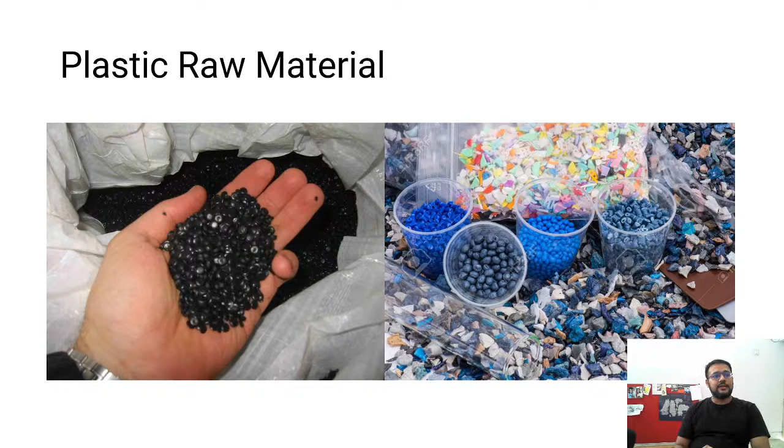There are of course many other ways, like for example, the base material could be lactic acid, which is typically extracted from cornstarch and some natural materials, even from plants. I don't know of any examples of plastics being extracted from animal items, but let's say plants. Polylactic acid is something very common to most people, where the plastic is extracted from plant byproducts.

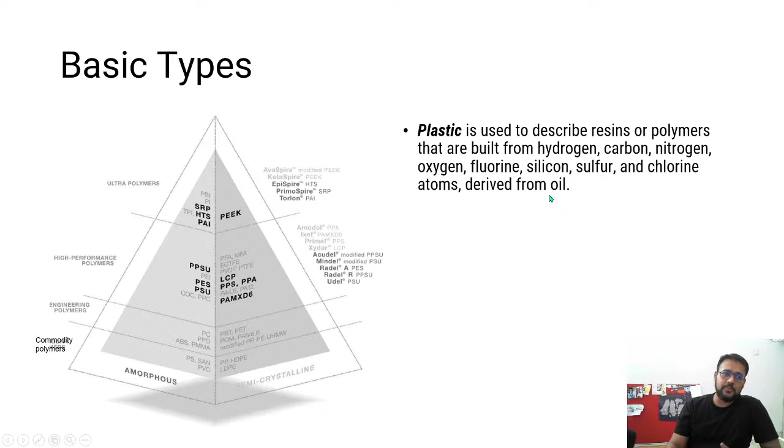Plastic is like an overall term which is used to describe all these kind of polymers and resins, so the internal structure mainly consists of elements like hydrogen, carbon, nitrogen, fluorine, silicon, things like this. And they are typically derived from oil - you could derive it from crude oil, but you could also derive it from some plant byproduct oils.

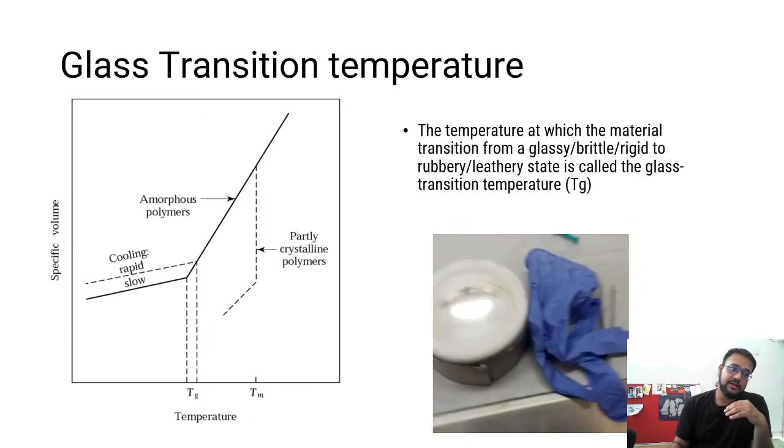Let's say a nitrile glove like this - the glass transition temperature is below the room temperature. So when he cools it in nitrogen, the material crosses the glass transition temperature and becomes brittle.

Most plastics which are hard, like this piece - the room temperature is lower than the glass transition temperature, so that's why this is harder.

This property is important because it's considered when manufacturing plastics. For example, if you want to manipulate plastic, you need to heat it to a certain state which makes it softer. If you want to put it through an injection molding machine, you should know what temperature it will start melting, start flowing - all those things are defined by the position of this glass transition point.

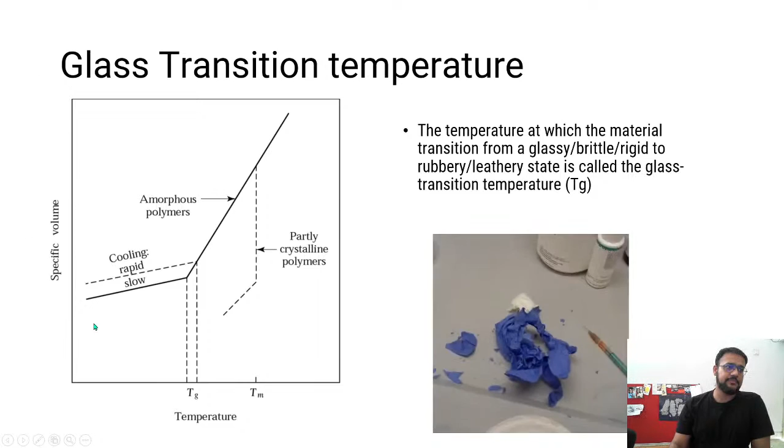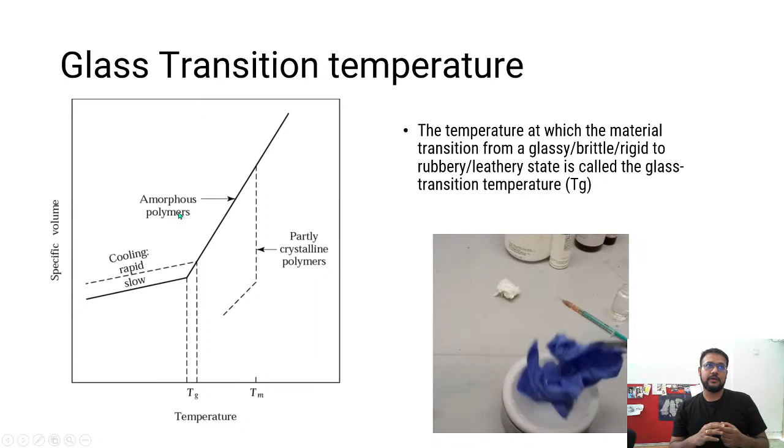Okay, so here you have an example of a certain polymer. On the y-axis you have specific volume, on the x-axis you have temperature, and Tg is the glass transition temperature. After this glass transition temperature, the polymer chain kind of breaks at certain intervals, which makes it easier to flow. I won't explain this too much, it has a lot of other details, so I'll refer you to the book and want you to go read about it more.

Glass transition temperature is a property specific to thermoplastics, whereas in thermosets such behavior is not clearly seen. This transition from a leathery state to a brittle state is not seen in thermosets.

In thermoplastics there are common types. Let's not consider engineering plastics, let's talk about commodity plastics. One type is polyolefins, where you have polyethylene - low density and high density polyethylenes, and ultra high molecular weight polyethylene. This material is used, as I said, in implants, let's say.

Then polypropylene and these kinds of things. In vinyls, the common one is polyvinyl chloride, PVC, which you already know - there are a lot of materials made with PVC that you can find at your home. And finally polystyrenes.

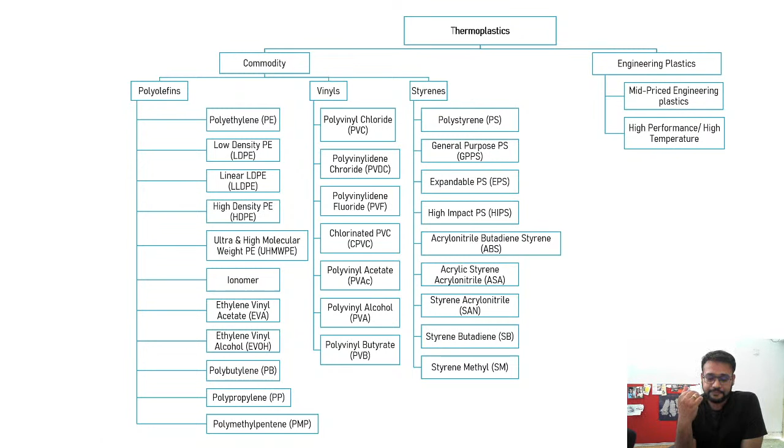So these polyolefins, vinyls and styrenes are the monomers, and once you polymerize them with certain types of additives, they become these specific plastics. So ABS and polystyrenes are in the same family if you consider the monomer - styrene monomer. So I'm not going through all of this.

In terms of raw material, how it happens is that in thermoplastics you get the final formed polymer in beads. Then those beads you can melt, and you can cast or injection mold into any kind of form you want. In terms of thermosets, however, generally what you get is part A and part B. In epoxy that's more true than in others.

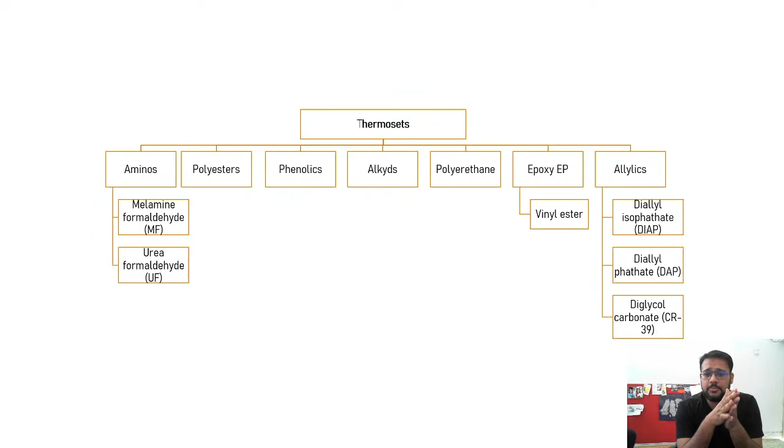So you get two parted things, which when you mix together, the polymerization reaction happens after mixing of these two, in situ or in location. That polymerization reaction is such that you create these long chains and you create these cross links also, and that's how it becomes hard and all that.

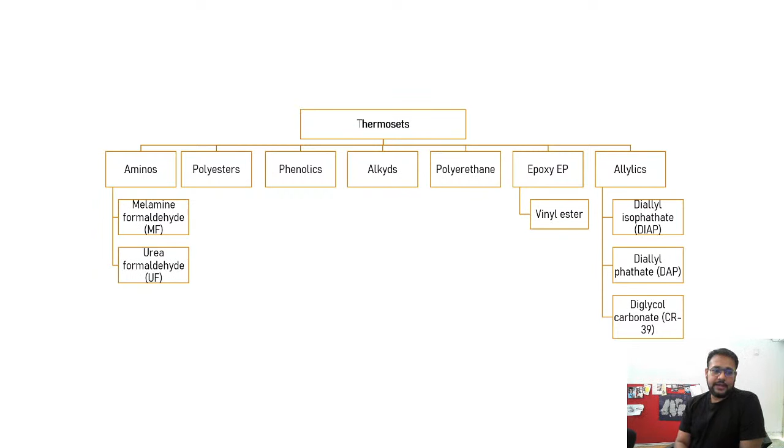There are some general recommendations of which types of plastics to use in which scenarios. For example, if you have a requirement of making gears, or fan blades or something, it's better to go with something like acetals, nylons, polycarbonates, and polyamides.

If the requirement is frictional property, so you need low friction, you need some things to slide against each other, polyesters and polyamides are better suited for such applications.

Similarly, for chemical resistance, if you want to store chemicals, you can use some of these types which would not react with the chemical being stored. These are just general recommendations of applications of different plastics - there are several types here, so I'll leave this to you. This is just a reference image for you, so if you need it sometime you can access this and see.

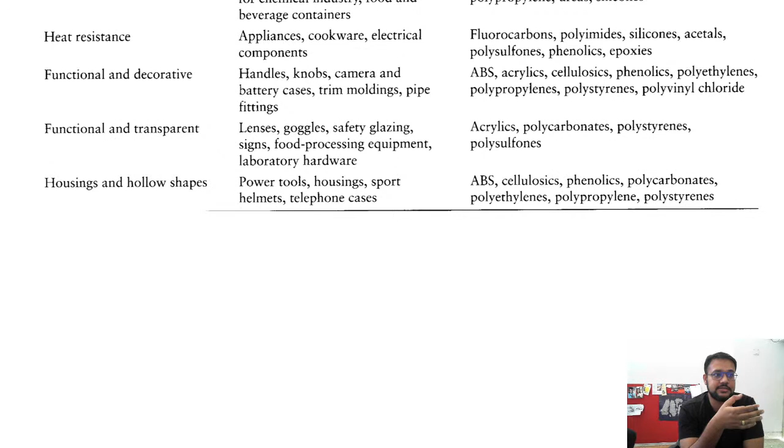So let's say I want to create a product which has x and y properties, or a part which has an xy property - you can choose the polymer type that would be suitable for you.

Now this is very interesting actually - how do you identify what plastics do you have? It is sort of possible to identify this. Let's say if you have a piece of plastic, this one - what exactly is this? The first step to do is to look at the bottom of every product.

So I want to show you this - at the bottom of every product, let's see if it focuses.

Wait, wait, wait. Okay, so if you see here, there is a small triangle here. I don't know if you can see it. So here, the small triangle that's there. In every well-made plastic product, typically you will see these kinds of triangles. I think this bottle has it too.

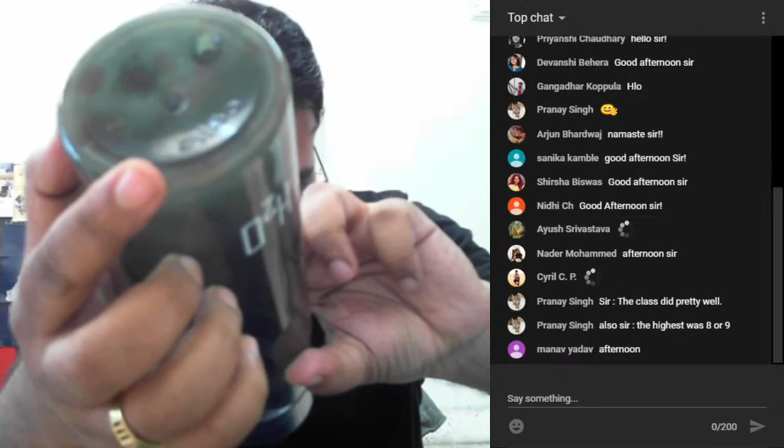Wait, wait, wait, where did it go? Can you see? I don't know if you can see. Just a second. I got it. Okay, can you see that triangle? It's shining just a little bit.

So every plastic product has this kind of triangle underneath. The best way to identify what plastic it is, is to look at the triangle, and generally it tells you what plastic it is. So this piece I have says there's a 1 inside the triangle, and it says PET. So this is a PET bottle.

But let's say you just have this piece over here. This also has the marking, but let's assume it did not have one. Then how would you identify it? This chart gives an interesting idea.

First step is to heat the tip. Let me transition - so first step is to heat this piece, and see what happens. What is the property that is there? Okay, I don't have it set up, let me do this experiment for you. Let me try and do it.

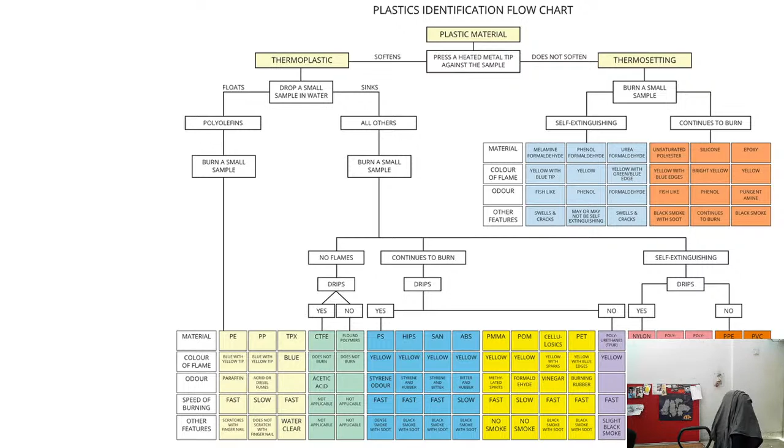Right, so I have this broken piece of plastic, and what I'll do is, the first step is to heat it. Turn off the fan. Don't try this at home - or actually you'll have to try this at home, because this is kind of your assignment. So if I heat it, what I see is it's softened, much softer than before. So this tells me that it is thermoplastic.

Then the next trick is to drop a small sample in water. If it floats, then you know it is polyolefins, or if it sinks, there are chances it is one of these other types.

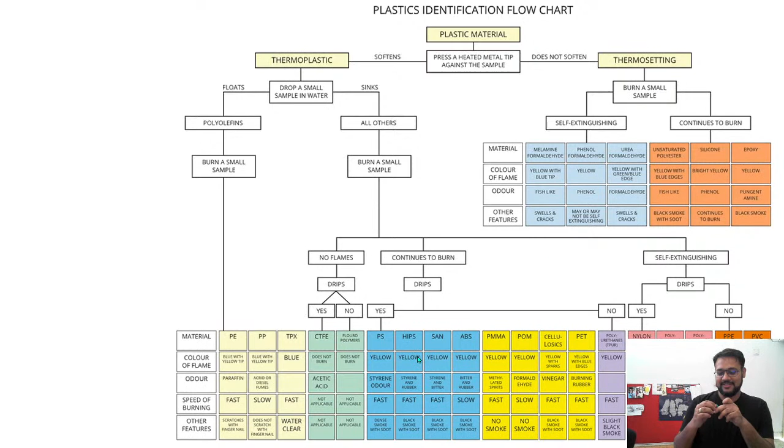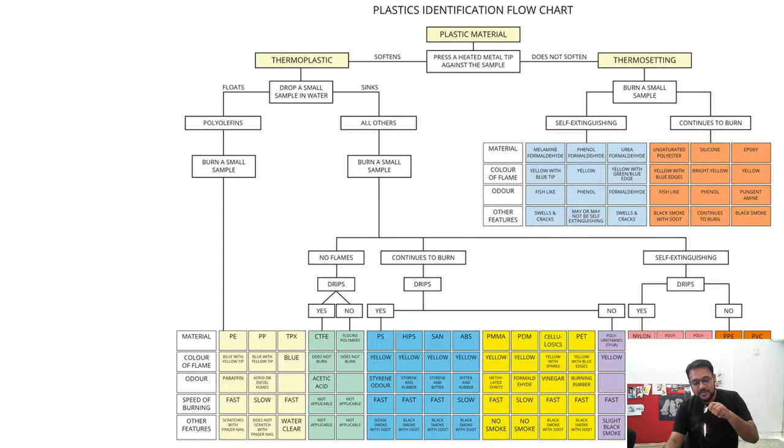Okay, so let's burn this sample and let's see what happens. After that, the flame characteristics will tell you what exact plastic it is, or get you closest to what plastic this is. It's dripping - look at the flame characteristics and all that, and make sure you don't hurt yourself doing it. So yeah, we saw what happens.

We didn't do a drop test in water yet. Do I have water? I have a little bit of water, let me try it over here. Okay, yeah, it's floating, right? So most likely it's a polyolefin.

We burnt a sample, and what we saw is the color of the flame - it's blue with a yellow tip, so chances are it's polyethylene or polypropylene. What was the odor? This one says paraffin odor, or acrid or diesel fumes - it was fuming just a little bit.

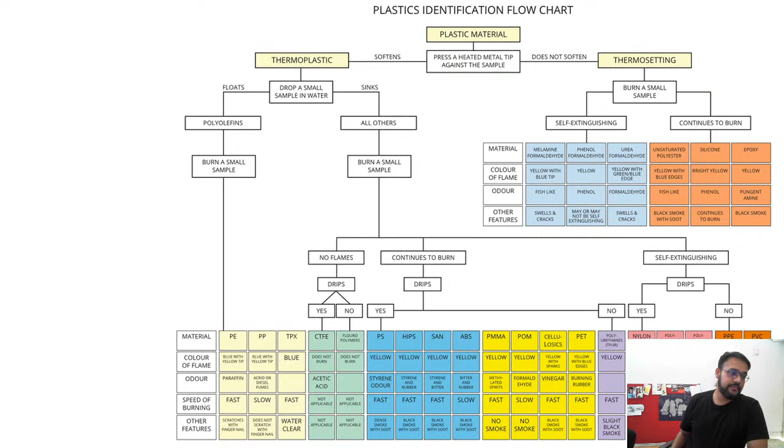And finally, now I'm kind of indecisive between polypropylene and polyethylene. Speed of burning - was it fast or slow? It was fairly slow, not too fast.

Finally, does it scratch with a fingernail? Polyethylene is fairly softer. So instead of a fingernail, I can also use some other simple metal and see - it does not scratch easily. It's a little oily, so that means it's an olefin, and it does not scratch easily. So most likely it's polypropylene, and I think that's true because this is a piece from a marker cap.

So you need to do this - there are two parts to your assignment today. This will be one part, so keep this in mind. I'll keep this slide, so naturally all the slides are available to you. This image is within the slides - it's a little too big, so you might have to squint your eyes to see the details. Remember to be safe.

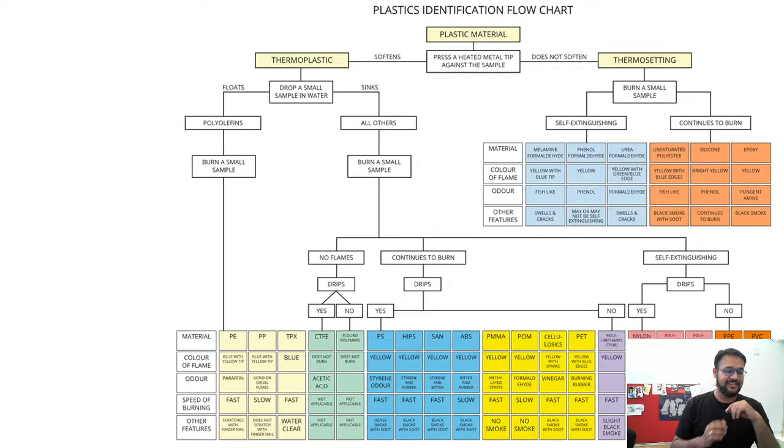I'm assuming you are all above 18 years old. I hope you guys are, right? So that means technically you are adults and you don't need adult supervision.

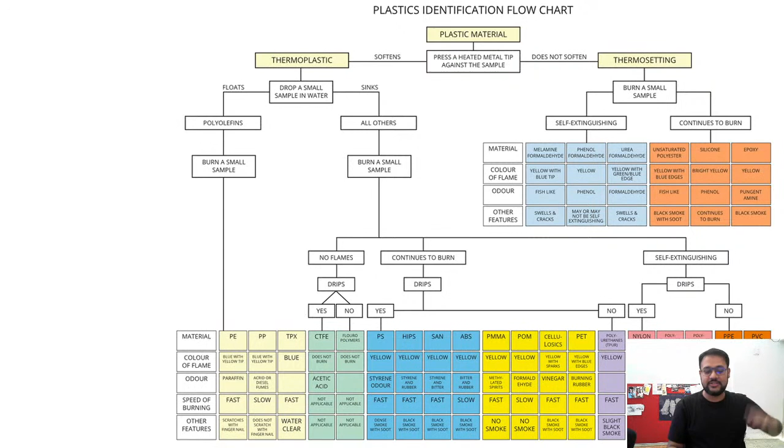This is about a rule of thumb for identification of different types of plastics. Let's go forward - the triangles at the bottom of every product. You can easily tell what kind of material that is by looking at these triangles. If it's one, it is either polyethylene or...

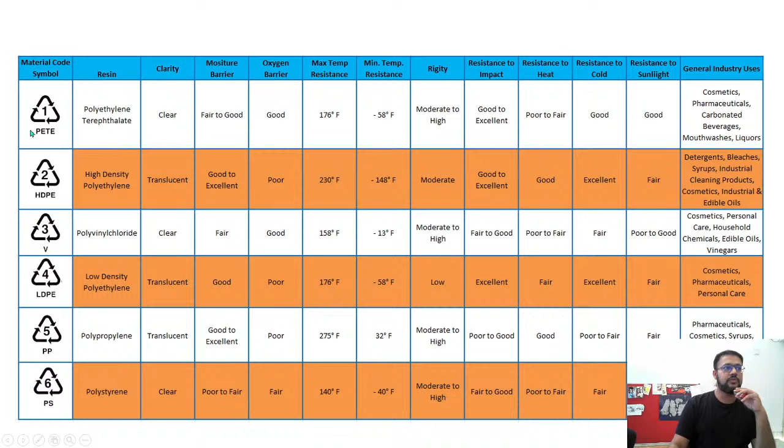PETE. There are different types of PET available. This tells you about some of the properties that are there: there is some clarity, meaning it's transparent, it's a fairly good moisture barrier, and it can resist up to 176 degrees Fahrenheit, and so on. You get this kind of triangle at the bottom of most products.

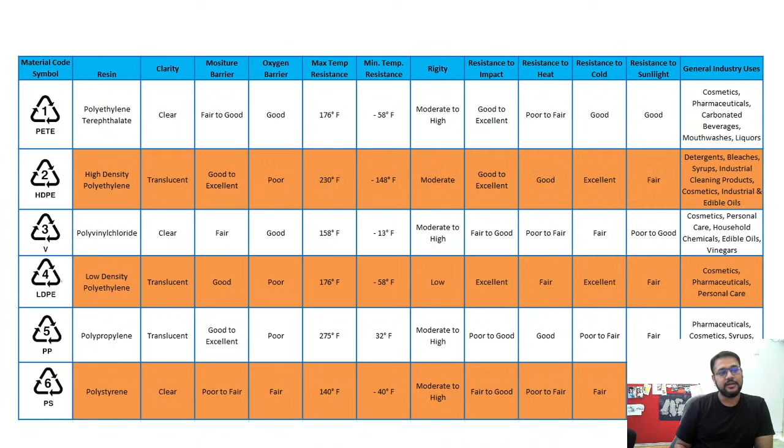So this one is also PET. I am mostly showing PET plastics over here, but you get a lot of products which are made out of ABS and other kinds of materials.

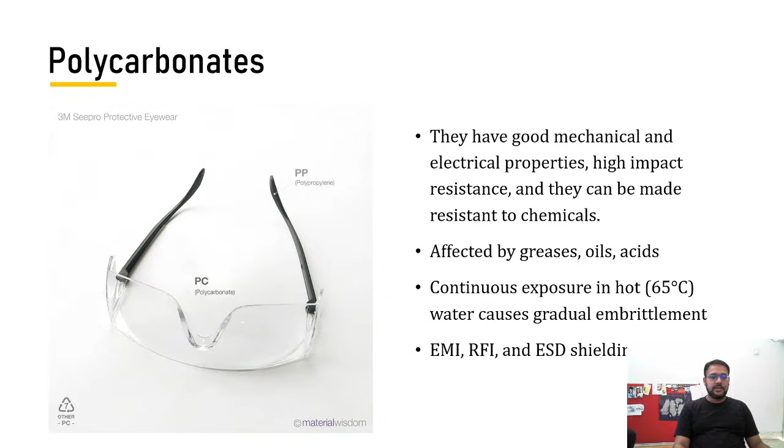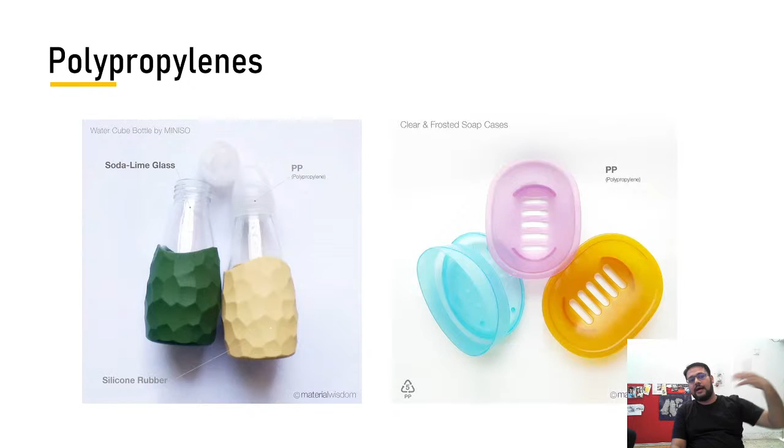So next, there are so many different types. What I did was, from the plastics and composites course, I took some slides which I thought were interesting and relevant and common, and put them in this presentation. So that's how this was designed.

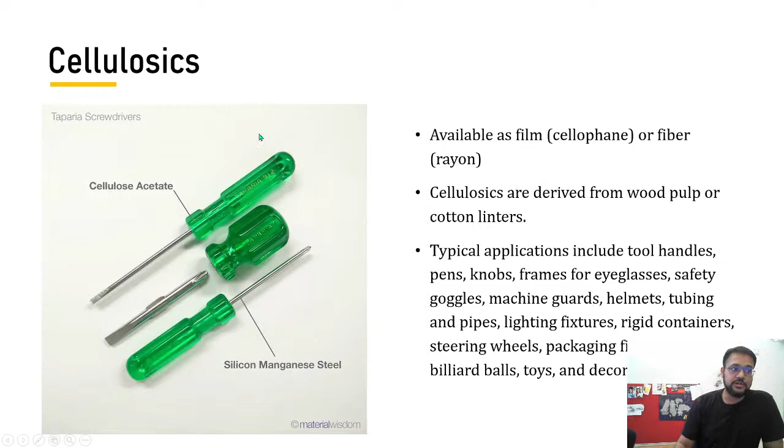Cellulosics is another type of plastic which is very hard - like cellophane paper, what you use to cover food. Those kind of films can be made using cellulosics type plastics, and you can make these kind of products. What material property makes this handle to be made out of this plastic? It needs to be rigid, not change over time, have weight and heft, and should not be slippery. It should also interface well with the metal. So these requirements make cellulosics suited for this kind of application.

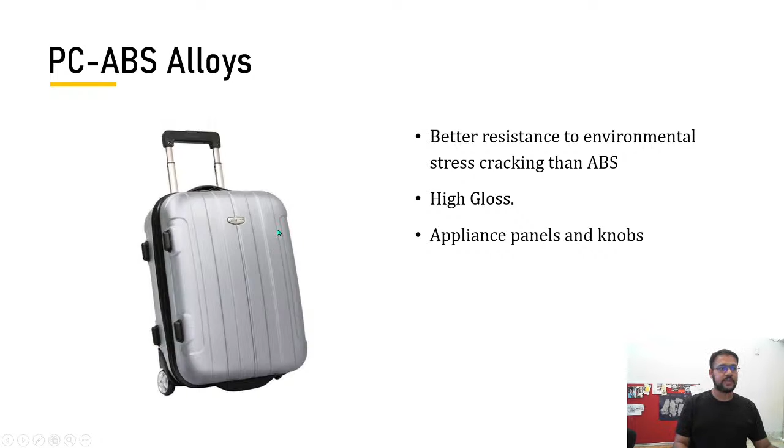I'm sorry, there's someone at the door. Just give me a second. Sorry about that.

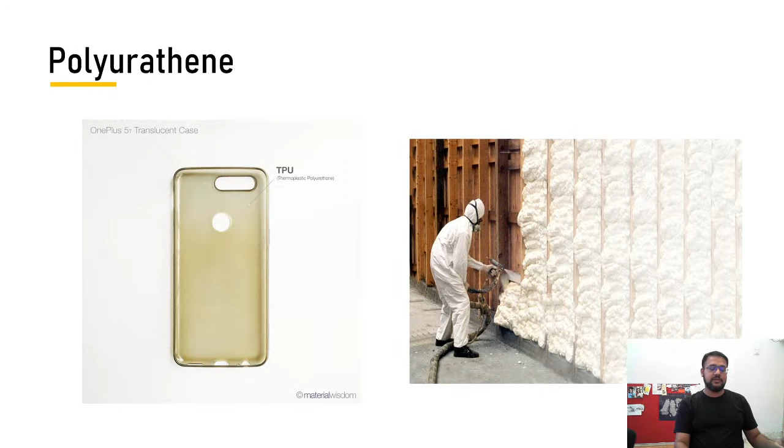We have this in the department. Sometimes students use it to make models. So here you see it as foam, but it has already hardened. I can't really describe the property properly, but it's not exactly like thermocol, which is much softer - this is much harder, and when you sand it, it gets sanded well. So it's really good for form explorations also.

Anyway, so that was like a very crash course of some of the plastics materials. So let's take a look at the manufacturing side of things - how would you manufacture plastics? The most common one that we know is injection molding.

So I told you we were going to discuss just injection molding, but I thought some context would be really good, so let's take a look at this small animation. In this presentation, there is another video that I'm not going to show here on YouTube because it will get copyright strikes. But once the presentation is available to you, you can go and see that video which has a much better, more detailed explanation of what goes on in an injection molding machine and why it is so interesting. So let's take a look at this video.

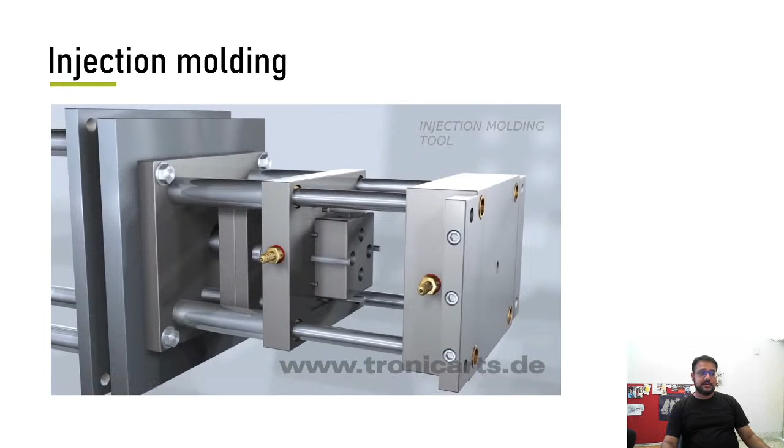And this is what the machine looks like, a stripped down version. We've removed all the other parts that are needed in the whole machine and just stripped it down to two major components: one is the tool itself, and the part that holds the tool, let's call it that way. We are not going to look at the jargon of the whole thing, but we just want to understand how this happens, how injection molding happens.

So this is the die. These two pieces are the die, and unlike, let's say, gravity die casting or aluminum die casting, this is much more complicated. You can see these kind of fittings that are there to cool the die. Behind these fittings, die makers have drilled channels internally in such a way that you can pass fluid from one end, and the cooling fluid comes out the other end, running through in a specific pattern throughout the die to cool it down to a certain temperature.

The reason you want to do that is because you are handling hot plastic, and the cycle time of making a piece of plastic is incredible. Such a piece, for example what is shown here, probably will be made in half a second. In half a second, the molten material is shot into this cavity, this thing opens up, and you can remove the whole piece. It's that fast, so you can imagine using it over time.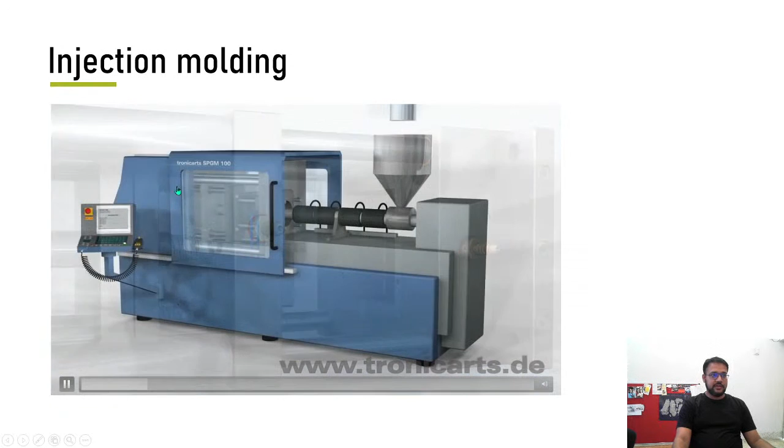So let's move on. You can see there are these pins that are there, and there are springs over here. And this, by the way, is the whole machine, this is how it looks like. There are a lot of other subsidiary or auxiliary components which kind of help the whole injection molding process.

Naturally there is a console to monitor the whole thing, but this one is where the plastic kind of comes from, so this is like a hopper. That means the pellets that I showed you at the start of this lecture are over here, and they are fed into this kind of tube, where there is a screw which has a certain specific design. Once the screw rotates, it kind of pushes those pellets forward.

And these black pieces that you see over here are heaters, and they heat the outer casing where the screw is held. Internally, because of this heat, the plastic, as it travels through the screw, gets molten. So those plastic pieces are put in over here, and these are the heating elements, and that's the screw I was talking to you about.

I don't know if you are noticing, but the screw is not of uniform cross section throughout. It has a smaller diameter, the shaft of the screw is smaller over here, and as it goes forward it gradually increases to a point where it remains constant. So you can imagine what happens to these pellets pushed forward by this screw—they get squeezed to a certain degree as they travel through the screw. Let's take a look at this if it shows that.

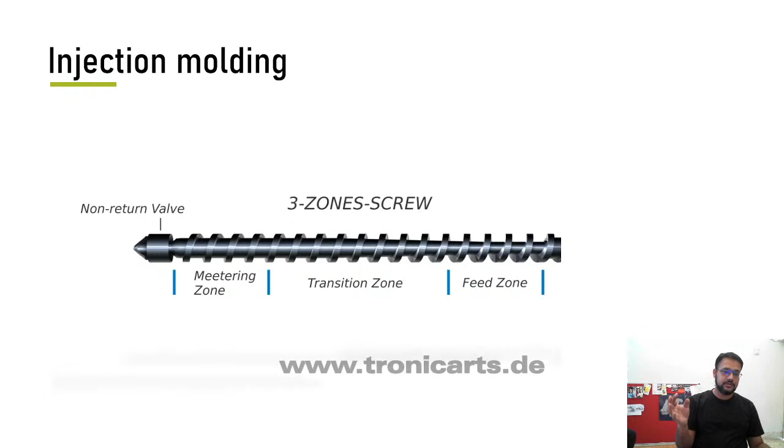So it gets pushed in, it gets melted, and it comes forward. Now once it comes forward, this acts like a non-return valve, so the molten material cannot come back again.

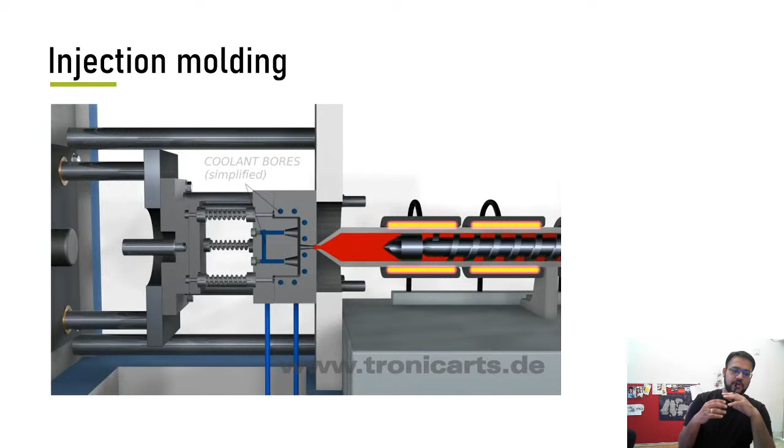Once this is showing you the cross section, you can see these are the holes which are drilled through which coolants pass, and these coolants ensure that the mold is at a uniform temperature. The other thing it ensures is that when the plastic part cools down, the cooling happens at a uniform rate throughout the part.

It's not like it cools at a certain location more than the other, which may induce problems of warpage. Warpage is like, I want this plastic to be straight, but what I get is something bent like this. That is warpage.

Let's take a look at what happens. Now the whole screw pushes forward, and it injects the molten material into the cavity. Once that happens, this thing cools down and this retracts.

Once it retracts, I wanted to show you this. So it retracts. Pay attention to what happens to these small pieces over here.

So the backing plate, this small plate over here only moves to a certain distance, whereas this die piece keeps on moving back. So these pins are pushed forward, and because of that the plastic part itself is ejected. These things are called ejector pins.

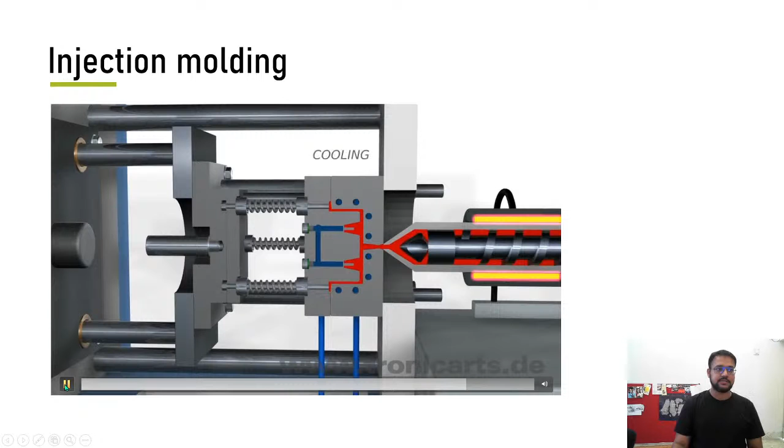Some terminologies from casting get taken over here also. So this is the gate. This molten material, where it travels, that is the sprue. There is a gate where the sprue touches the part itself.

All those considerations of flow front and the temperature considerations become important for injection molding also. And the part is ejected. I think it repeats one more time.

So that is how the injection molding machine looks like. The design of the die is something very critical, and that is the expertise of most mold makers. They'll have a specific type of machine and they'll design the die to work in that machine, and the die will be designed in a manner where these cooling things are taken care of, and even if you have some types of undercuts, some simple undercuts, those features can be dealt with.

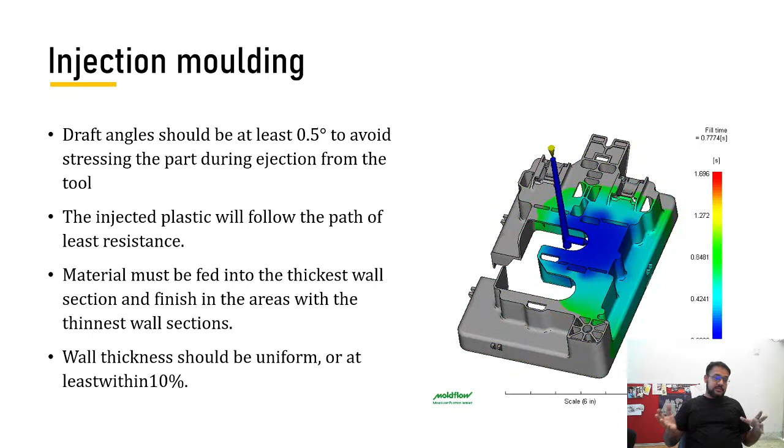So naturally, you saw it's a very critical manufacturing process, and there's extensive knowledge on this. This is probably one of the manufacturing processes which has more knowledge base than all others. But still, you'll always end up with some kind of defects, and there should be ways for you to identify these defects.

So what happens in plastic manufacturing is that once you have the design ready, you give it to a mold manufacturer. The person redesigns the part sometimes to make it suitable for injection molding. Then the injection mold itself is designed once the whole thing is approved. And once the mold is designed, you start making some initial pieces. Once you make these pieces, you find out some problems that you see there, and you modify the mold accordingly.

So it is a design process in itself, the mold design. You find out the requirements from the customers, you underline what requirements you need to take care of, then you design the mold, then you prototype the mold sometimes with softer metals. Once it gives you the kind of solutions you want, the plastic parts you want, you take it to the actual manufacturing of the mold and test it. If there are some errors, you rectify them and make the final mold, then deliver it. So that's a design process in itself.

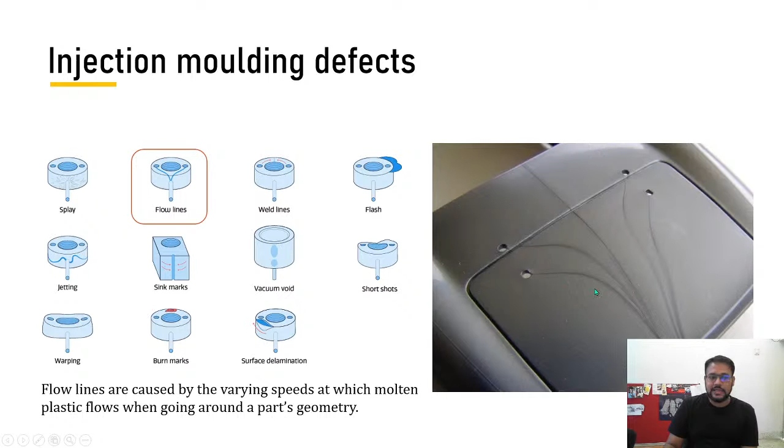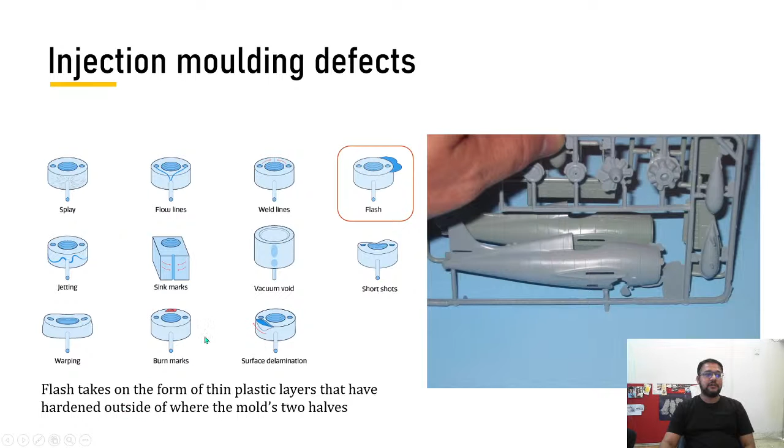Then there's jetting. This is similar to flow lines, but what happens is that once you put the material, once you push it, it kind of behaves like a toothpaste in the first few moments of the injection. That helps in the overall filling of the part, but that kind of stream remains in the final part.

So that's the jetting. The material was able to flow, if you see these kind of jettings, the material was able to flow, but that initial part was the problem.

Sink marks are more common than all of these others, and you can see it on almost all of the parts. You won't be able to see it in acrylic plastics and all that, but you will be able to see it in almost all kinds of plastic parts.

Sink marks result from shrinkage in the thicker sections of a mold. So by looking at this portion, I can say that this part is thicker. Since the mold is thicker at that point, once it cools down, one of the surfaces kind of caves in, the material shrinks and caves in. This gives you such a surface defect.

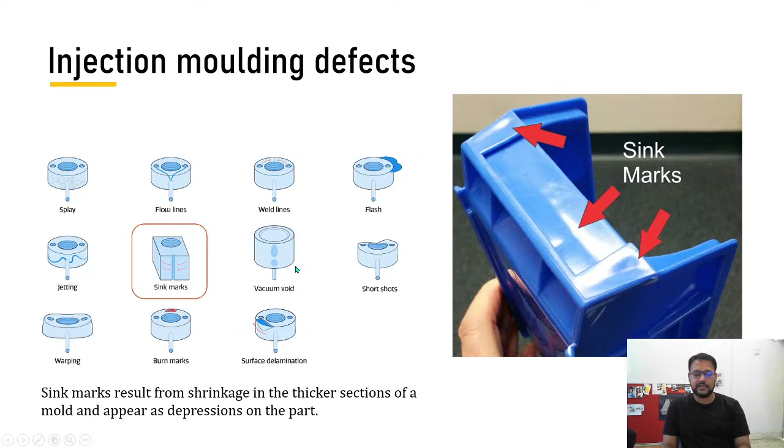Vacuum void is if there is an inclusion of a bubble or something like that in the mold, or rather a cavity in the mold.

So vacuum voids are bubbles within a part that can weaken its integrity. They result from trapped air or differential shrinking. So at this point, maybe it shrunk in all these directions. This is similar to a casting defect that we looked at earlier.

Shorts are, let's say, if you wanted to make this kind of plastic part which needed to be fully closed, but you did not push in enough material, so this is what happens. This is a short, meaning an injection short - you did not put in enough material.

Warping, as I said, is again a very common kind of defect that you see, and the reason is the overall cooling down of the part. You can see this is a warped part. It did not cool evenly, and that resulted in this kind of warpage.

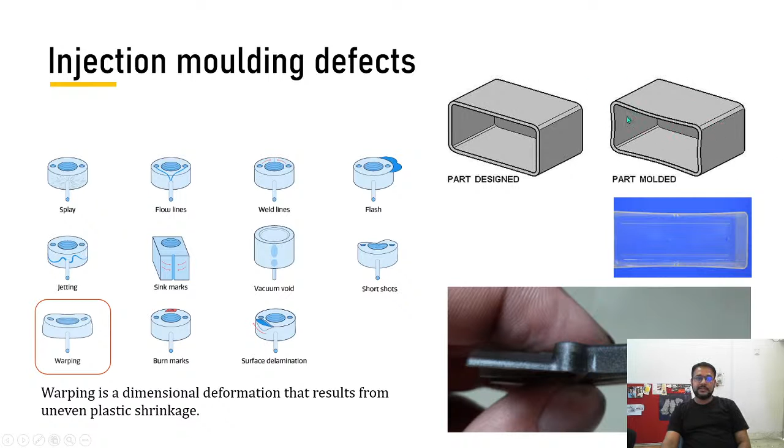Burn marks: sometimes if you have these kind of blind pockets, that means at the end where the flow front meets and closes, you may have to heat the material to a temperature very close to its burning point to ensure the flow remains sufficiently fluid to fill up the whole mold. If you're flirting with that kind of temperature, you end up with burn marks, where the material was heated to a much larger temperature and got burnt.

This is surface delamination. It is a very typical failure in plastics. You get these kind of problems where the surface kind of comes out in layers.

This is because of the settlement of the polymer chains along the surface line. There's a much higher friction between the surface of the mold and the polymer chains, so they tend to align themselves along the surface, but consider a layer just beyond it - it need not be so much aligned, so there's this layering effect which happens, and these layers can end up with a defect. It's a fairly common defect.

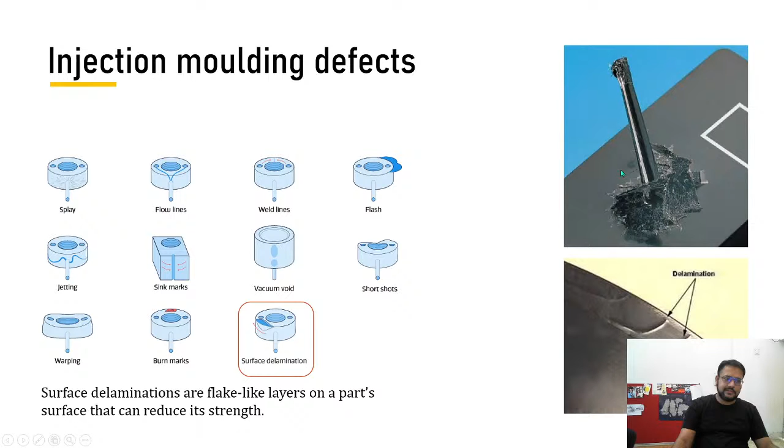Draft angle, we will not discuss this in detail - you already know the slide is there, and there's some details here that you can think about. Let me just take a look at it.

In terms of plastic manufacturing, draft angles are typically added at the cavity side of the tool. So this is the core and this is the cavity - the parts of the die where you have machined in, that is the cavity, and the part which is machined out is the core. Typically, draft angle is added on the cavity side.

This shows a draft angle of half a degree - it says minimum half a degree. The reason you add a draft angle is for two things: one is, of course, once you open the mold, you should be able to remove the whole piece easily.

The other reason is that between the cavity and the plastic part itself, there's no gap between these two when the plastic is solidified. So if you try to pull the plastic part out, it will not let you, because there's no place from where air can pass into this cavity. So it will work like a vacuum suction cup.

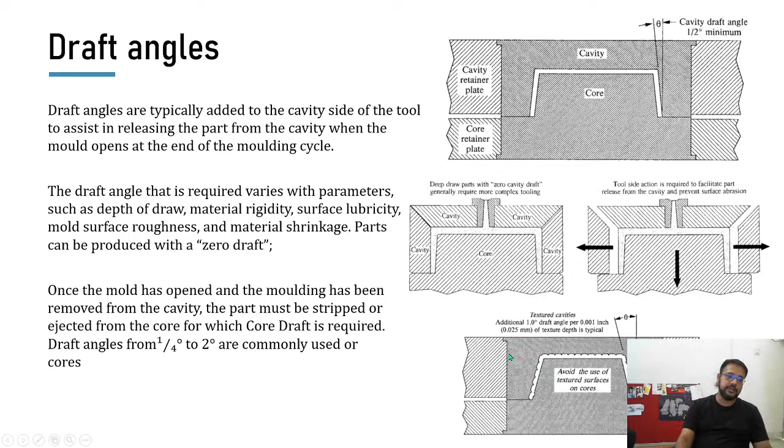If you add textures to your part surfaces, then it's suggested that you increase the draft angles naturally to accommodate for these textures.

The second thing to take care of in plastic part design are undercuts. These small pieces are used to join plastic parts, they are called snap fits. The design of the snap fit is not in scope of this course, but there are several different types of snap fits, and almost all types of snap fits have to consider the undercut problem.

So here, for example, this small surface over here is an undercut. Imagine the mold is moving up and down like this, so there's no way I can remove the mold if this is there. To accommodate this, I can do a simple thing: I can cut out this, so there is access to this surface from this hole, from the cavity side.

Similarly, features like these, cuts like these, are added to accommodate undercuts. So let's say you have a part where you have two holes on the side. This gives you an idea of how you can get that. You can design the core and the cavity in such a way, and the gap itself in such a way, that the core and the cavity meet along the diagonal of the gap. That way you can make these kind of openings, and you'll get a small parting line along the opening at the corner.

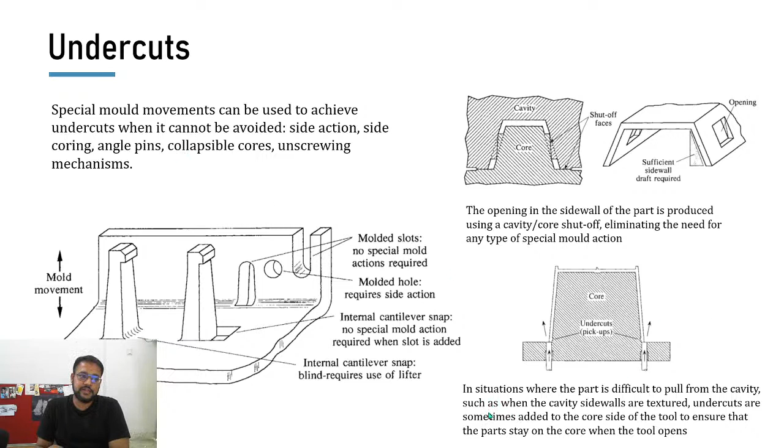So in situations where it is difficult for a part to pull from the cavity due to an undercut, sometimes the sliding of the core itself is used to open the tool.

If you have some very elaborate undercut, sometimes specialized manufacturing processes are possible where you can make a core, injection mold on top of the core, and then melt away that core using either heat or chemical compounds, to have a non-traditional undercut design. So this part wouldn't have been possible otherwise. You would make this piece in a certain type of metal, injection mold on top of this, and then melt away this part.

That's the idea in some of the manufacturing processes - it's called fusible core molding, or lost core molding. It exists, but naturally this part is now so much costlier, because every time you have to make this part, you also have to make this kind of a cast machine piece, and that makes the cost of this part that much more expensive. But considering, let's say, if this part needs to be used in a high performance automobile, this cost is justified, so you can go for such a manufacturing process.

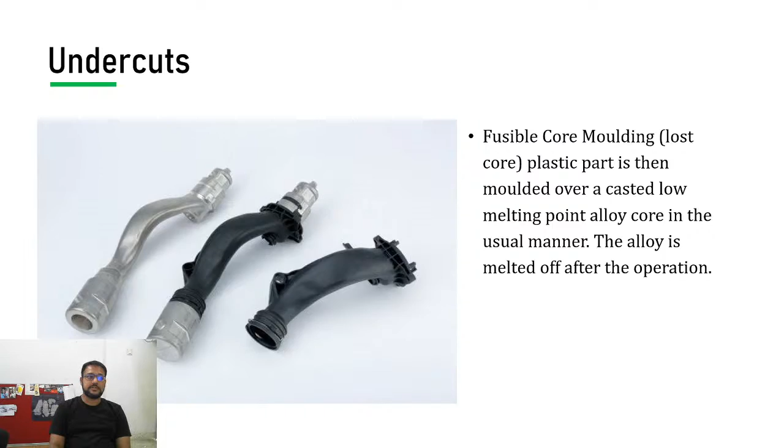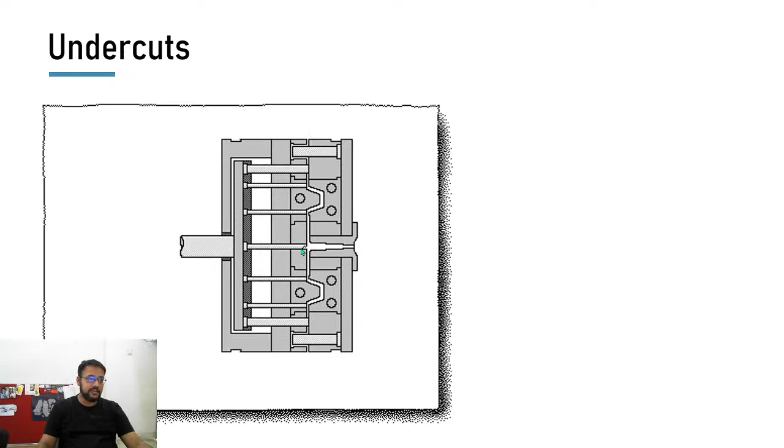Now we can take a look at some ingenious mold designs where undercuts are accommodated in the part. These are small gifs which show you how it's executed. For example, in this part there is a small notch which becomes an undercut, so that notch is accommodated in the ejector pin setup. This part moves back, and this is also part of that ejector pin setup, and you get this kind of undercut.

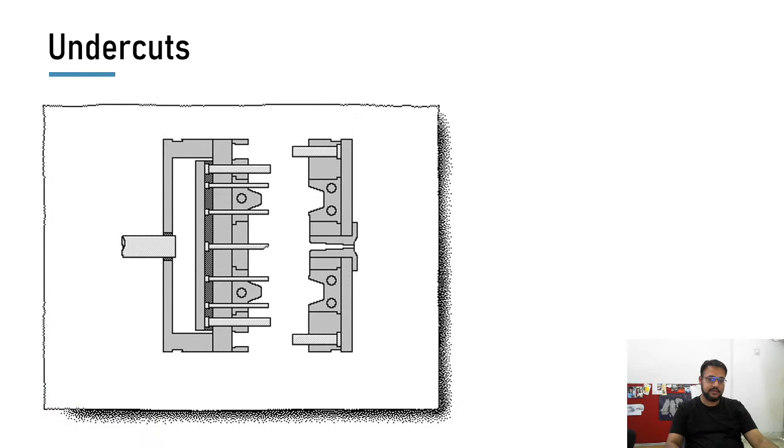Okay, so here's two more. Sometimes you have a part design which is quite difficult to remove from the core, not just because of the draft angles, but because of not being able to let air in. So you have these ejector pin setups where it's pushed away from the mold in a different manner. All of these assemblies and ways of doing it are accommodated in the mold design itself, so you can imagine sometimes it may become very complicated.

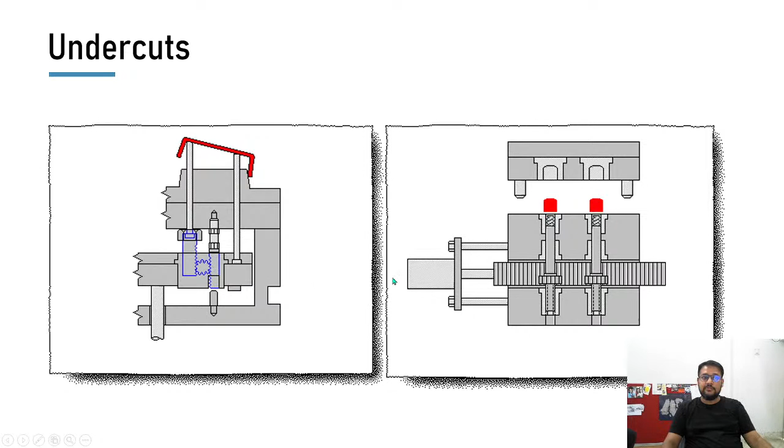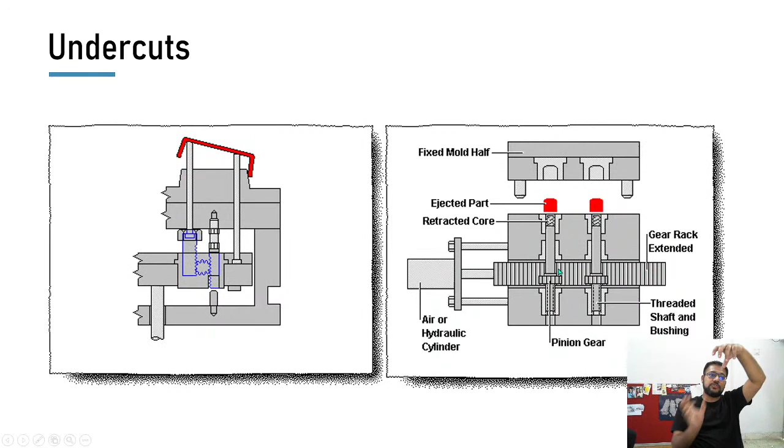Bottle caps, for example, can be made with something like this. Here there is a rack and pinion arrangement - imagine this like an uncoiled gear with small gear teeth. Once the mold is removed, you have an air or hydraulic cylinder which pushes this rack, and it unscrews the caps, giving you that undercut of the threads in the piece itself. It's quite interesting how it's done. Most of these bottle caps are made using this method. Similarly, if you need threads on the outer side, that's more common.

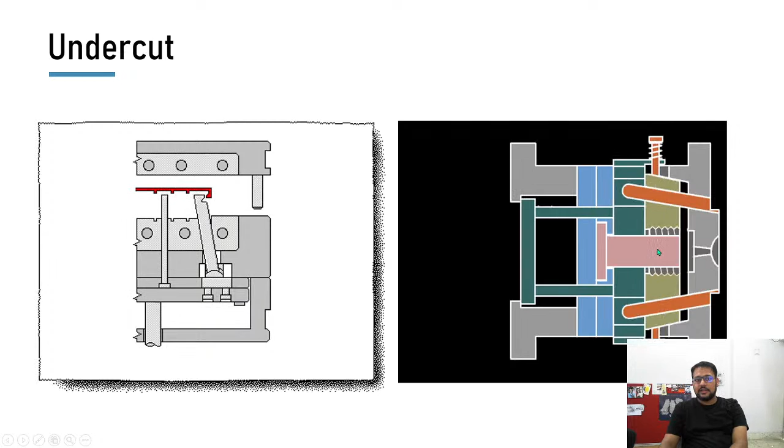See these two rods - they are called cam rods, and look at how they work. Once the die is pushed in, the rod engages and pulls these two dirty green pieces together, and they form the cavity of the mold. That's quite interesting.

The same idea is shown over here - this is a core blade, and you can see here it moves up, and you get this kind of undercut possible. Mold designers are ingenious people, and you can see these cam rods functioning over here. It's very difficult to entirely understand from the whole thing.

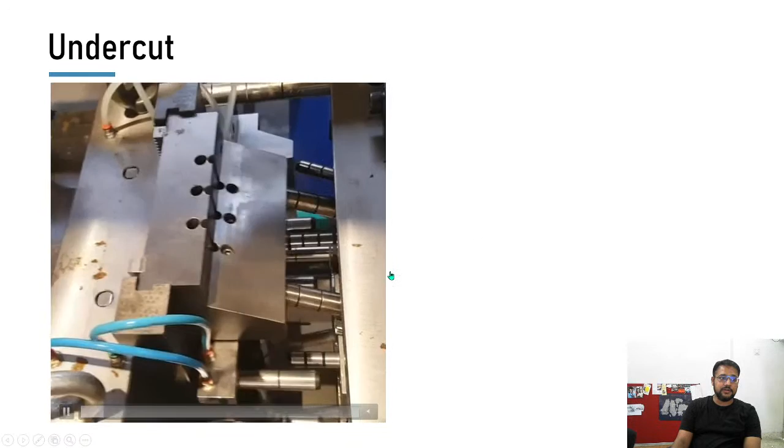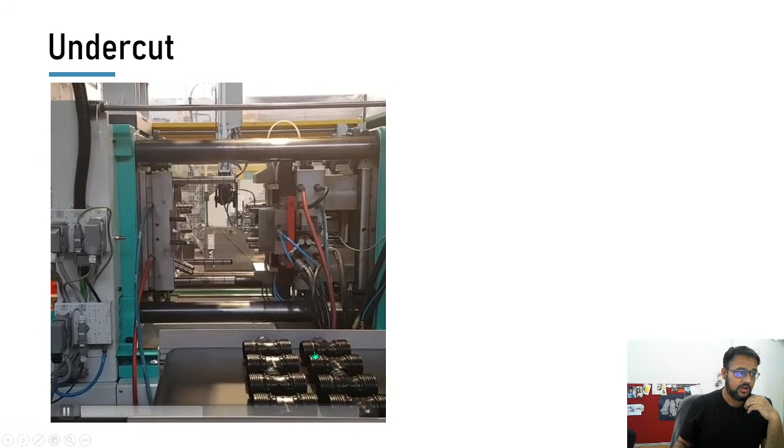So these are the cam rods, and they engage, let's say, in these holes - this one probably is going to engage in this hole over here. When it engages, it pulls the whole mold down, and you get these parts where you have undercuts on the surface. It's possible to do that. So yeah, those rods pull the whole part together.

Okay, we'll discuss two more manufacturing processes and then close this - two more common ones, and the first is blow molding. Most bottles are made using blow molding, and most likely this one is also made using injection blow molding. Injection blow molding is a combination of these two processes, and it's a highly automized process where you have a central place where an injection molding is connected at one end and a blow molding is connected at the other end. The injection molding machine injects the plastic into certain pieces, called preforms.

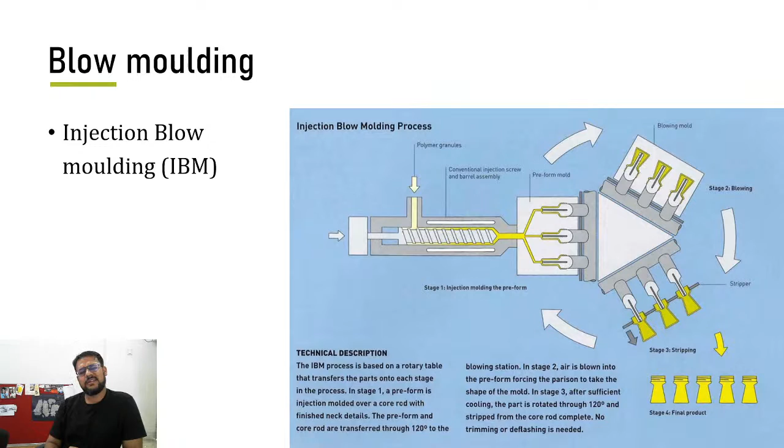Then the mold is opened and these preforms are taken to another mold, and you see these tubes - they push air through the whole piece, and that blows the whole thing like a balloon to the shape of this blow molding mold. In the third stage, it's stripped and removed. That's the idea - it's called an injection blow molding process, and this is from the book called Manufacturing Processes for Industrial Designers, by Rob Thompson.

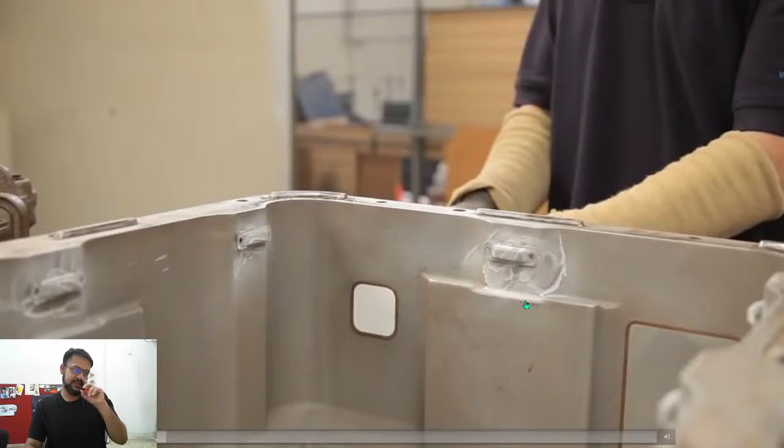So we can see a small video of rotomolding, and this is the kind of molds that are there - it's very large. Okay, just a second, I'll reduce the video. I don't think it's needed for the audio.

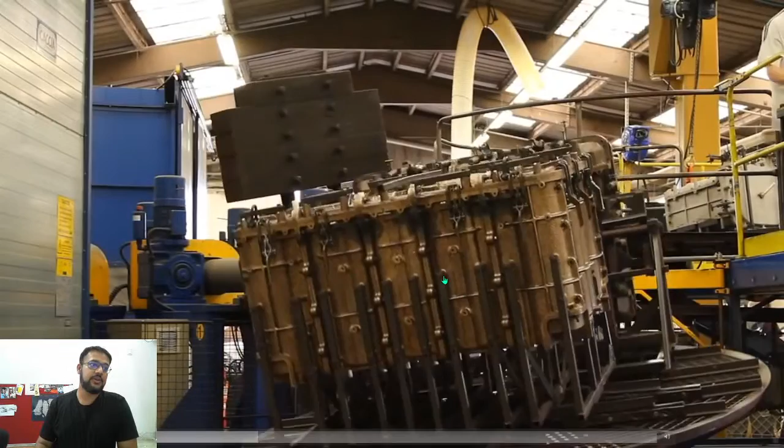So this is the mold. You can imagine how large it is, and they put in the necessary plastic, and they're going to spin it. They heat it and spin it. You can see these different stations.

This is the setup that this company has. You can see one station where it is heating, one station where it is cooling, and probably a third station where the part they are making is extracted.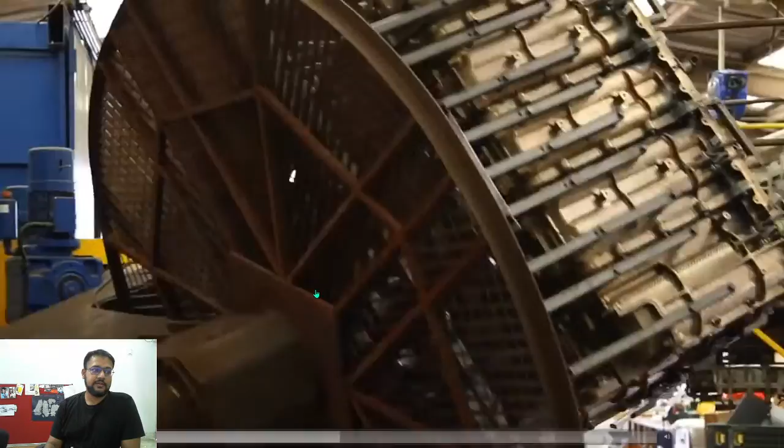All these traffic cones, Sintex water tanks, and many of the playground equipments are made using rotomolding. Lot of fun, right?

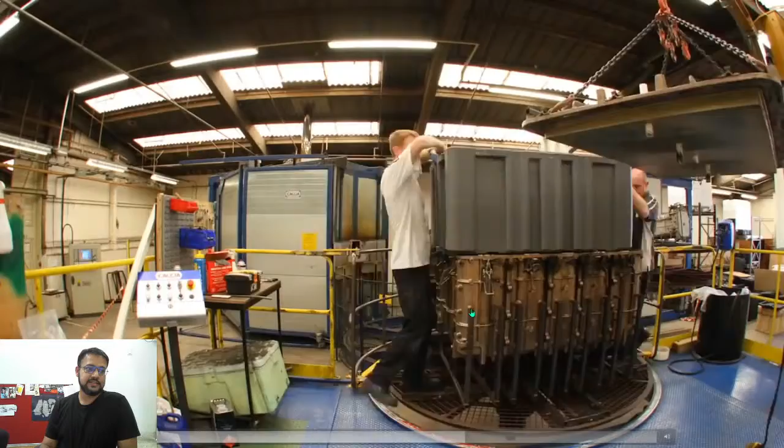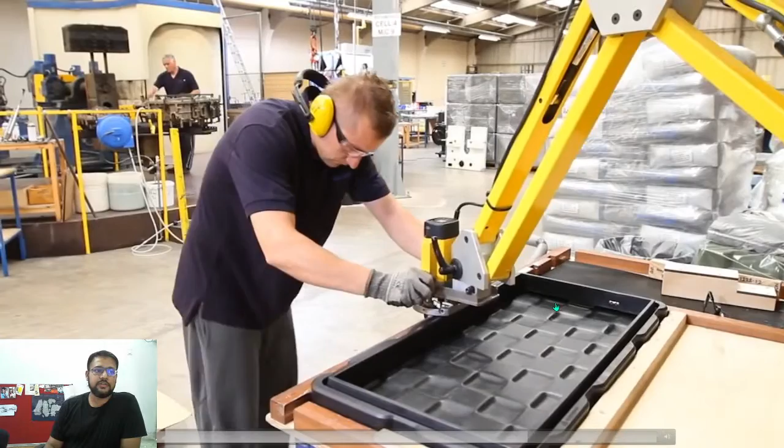So now that this is done, this piece is extracted. Some high performance briefcases are made using this also. What they are doing here is taking a router to the part and removing the flashes that are created. Then these fasteners are put in, and they make these containers to transport things. So this is rotomolding.

Then you have compression molding. Compression molding is just like squeeze casting - you have a material which is pressed between two dies, and the material takes the shape of the cavity.

These remote control buttons which are rubber kind, they typically used to be made using this. There are lots of other processes now, but these kinds you can easily identify are made using compression molding, and a lot of rubber parts are made using this.

You can also do compression molding for some high performance polymers. Some polymers like bakelite you can compression mold, and the best part of compression molding is that you can add metal inserts to the whole part. You can do it in injection molding also, but you can add this and get these kinds of pieces.

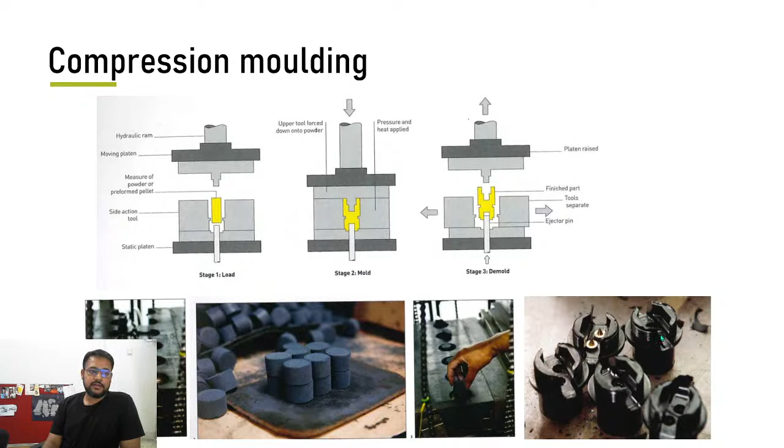And finally there is extrusion. I don't have a video of extrusion, but you can extrude plastic also, and make different types of products out of it. So this is about it.

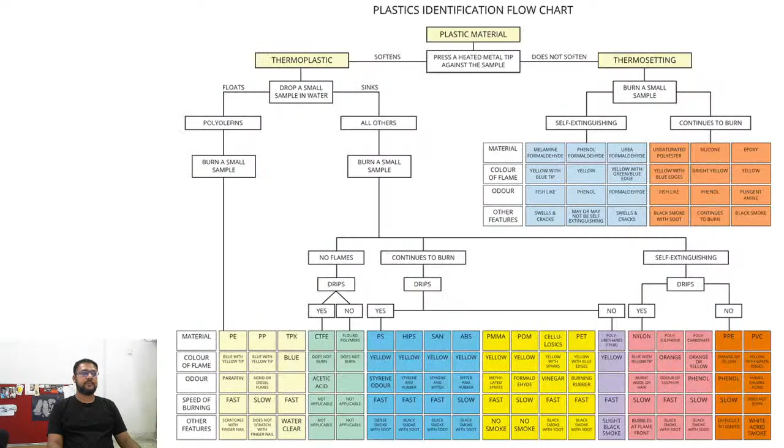So the assignment is twofold. You have to find three to five different types of small pieces of plastic which you can't identify very easily, what type they are - not by the triangles, it's very easy to identify the triangles.

Or you can do one thing: take five different types of plastic products, ones that probably you can throw away - it's okay for you to throw it away, because you'll do some destructive testing. The first thing, number one, is identify one type using this triangle and tell me what this is. Take a picture - this is the part.

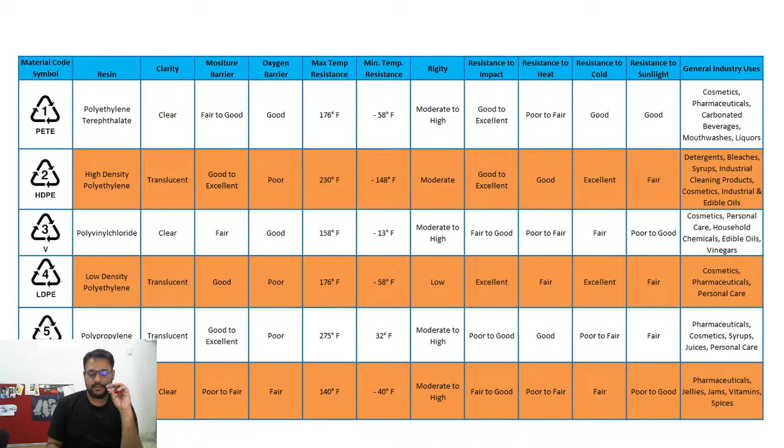You saw this guy from Material Wisdom, how nicely he took pictures - so you take good pictures like this. You tell me this is the triangle I see over here, and that makes it HDPE, or it says this is polypropylene. You can put in the presentation the photograph, or a bigger scale photograph. Just give basic information like this triangle says PETE.

The reason, and the next point is, why do you think this plastic was used for this particular application, for the product that you use? So at least one out of five you should identify like that. The others, you follow this chart and identify the different plastics.

So you can show pictures - show a picture of what you are trying to identify, and you can show either a GIF or a sequence of photographs to show that you conducted this, with the relevant points. So first you'll show a picture where you dropped it in water, and you will say it is a polyolefin. Then you will burn a sample.

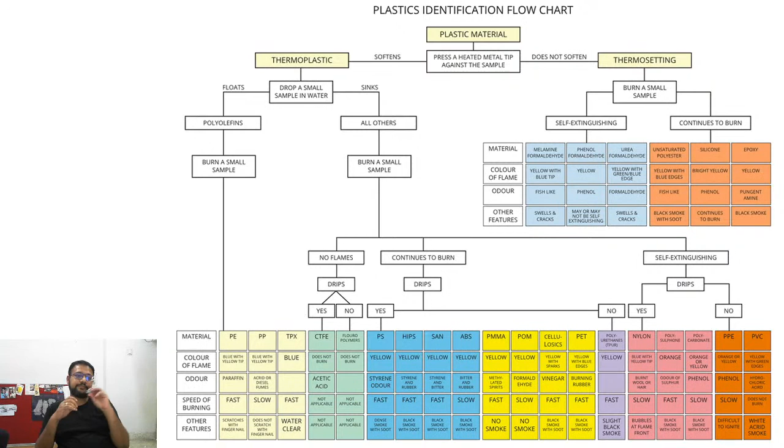You will take a picture of it burning, the flame itself, and based on that you will deduce what material this is. Naturally you will not be able to show odor, but you can deduce this and tell me what it is. So identify four different plastics using this chart, and identify one different plastic using this triangle, and tell me why that material was used for this particular application.

Did you understand the assignment? There are two parts to it. One is the identification of the plastic itself. The second is the identification of the defects. Put all this information in a presentation in a nice flow so everybody can see and understand.

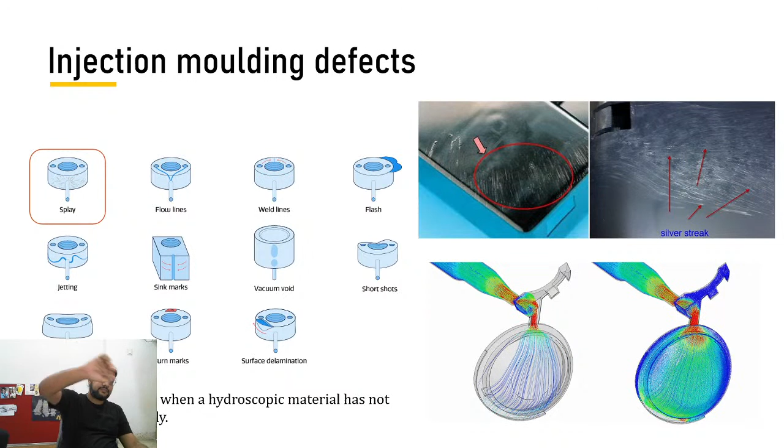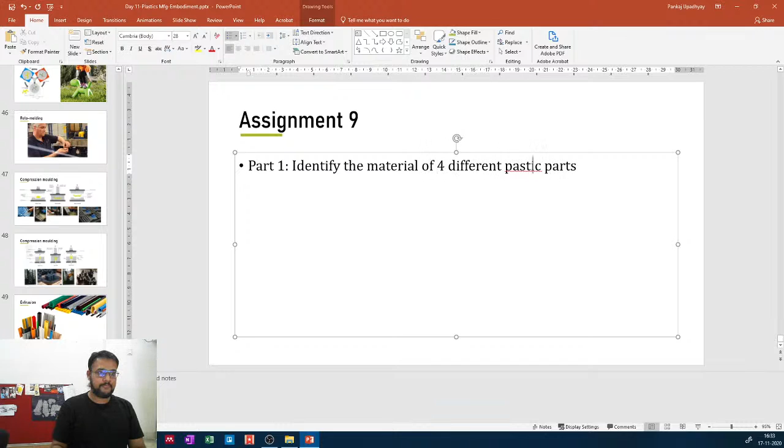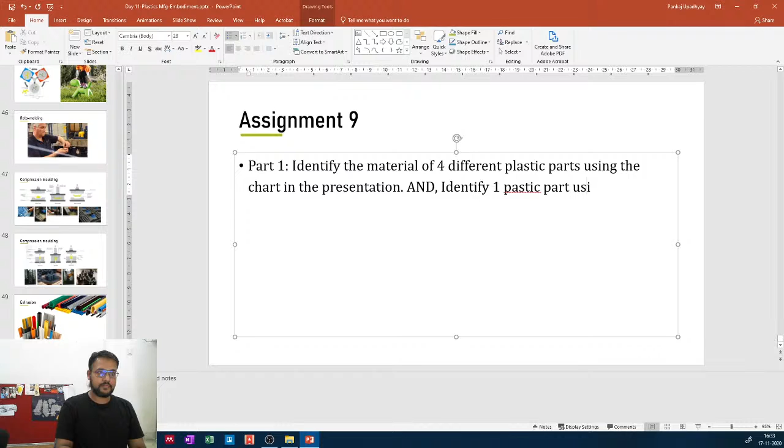Just tell me a yes or a no if you understood or not. So what I will do is, just give me a second, I will write it down over here. That's part one, part two.

I hope you understand. What if we find out that multiple samples are made of the same kind of plastic after testing? This is a good question. Chances are it is going to be polypropylene a lot. So identify the different materials based on feel. Try to ensure that you have four different types of plastic, or at least three different types. I'm sure you will find three different types of plastics, but if they are all different, that will be very nice.

If you test and find that this one is also polypropylene, like the previous one, then find something else with a slightly different feel. Here you will get a sensitivity towards how exactly that particular material feels in this exploration. Submitting four is what you will have to do, but to get four or five different types of plastic parts, you may need to test 8 or 10. It's a very simple exercise, so that should be easy.

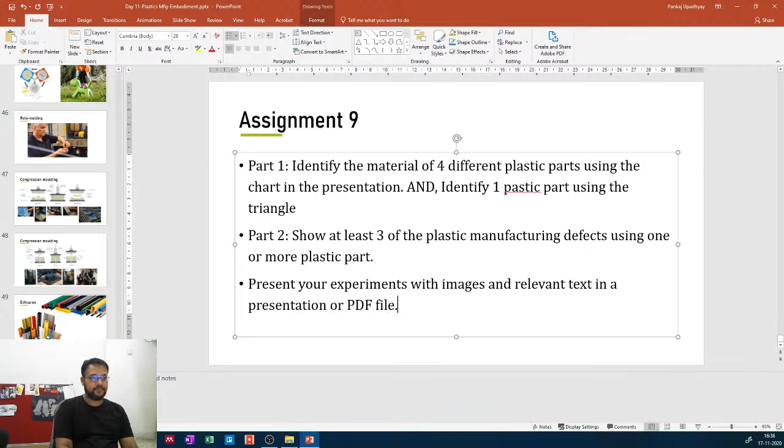Okay, that's the assignment, easy enough. Aniruddha asked, can we use different types of plastic bags? Most plastic bags are going to be polyethylene. I think you can use one polyethylene, but if you just try different types of plastic bags, I don't know if you'll end up with two or three different types of plastic. But maybe you can try at least one with a plastic bag. Try to be unique amongst your classmates, try to ensure you're doing something most people may not do, try to stand out in this.

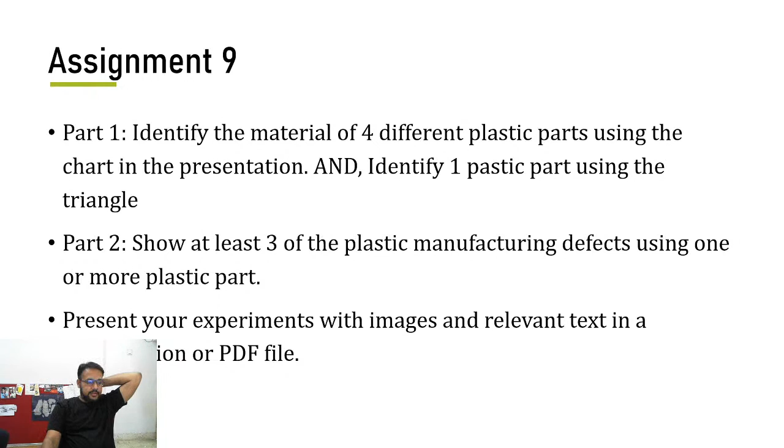So that's about it. I hope this was informative for you, and it was a very basic introduction to plastics manufacturing. There are so many other things that have to be discussed in plastics, and if you are interested, I would suggest you take the plastics and composites course whenever it's available to you. If you have any questions, I can answer, or we will close the class.